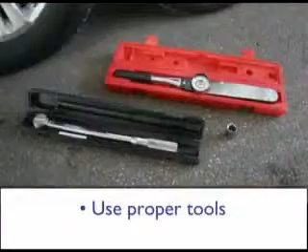To help ensure top performance and safety as you enjoy the freedom of the open road, we've developed this video to help make you aware of some important maintenance requirements for the wheels of your recreational vehicle. In this video, we'll show you how to maintain proper lug nut torque by following these important steps. Check torque before every trip. Use proper tools. Follow the appropriate star pattern sequence, and torque lug nuts in the correct stages and follow-up intervals after any wheel reinstallation.

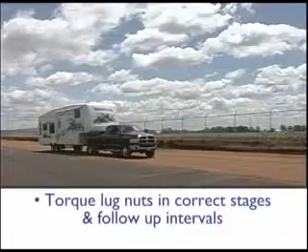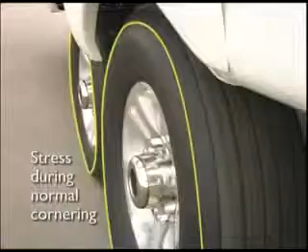The axle and wheel assemblies on your RV are designed and maintained differently than that of your car. The overall size, weight, and center of gravity of a recreational vehicle subject the wheels to pressures unique to trailering. As shown, during normal cornering, the tires and wheels experience considerable stress called side load. Due to the effects of side load on the axles and wheels, the lug nuts of your recreational vehicle require

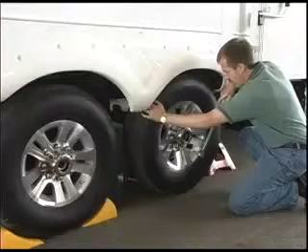periodic retorquing. As we begin this instruction, it may be helpful for you to have the axle manufacturer's owner's manual that accompanied your unit, so you can use the charts in the manual as a reference when performing service or maintenance on your recreational vehicle.

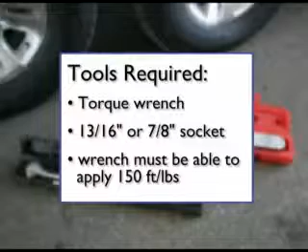The amount of rotating force applied to a fastener, such as a lug nut, is called torque. Proper torque of lug nuts can only be achieved using a torque wrench and a socket. Both tools can be purchased from your local auto parts store. Be sure the wrench you choose has the ability to apply at least 150 foot-pounds of torque.

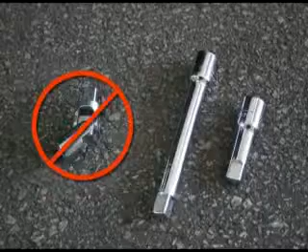Note that some wheel assemblies may require an extension. Be sure not to use a flexible extension. Do not use a four-way socket or any other type of wrench which does not measure the actual pressure applied to the lug nut. There are two common types of torque wrenches.

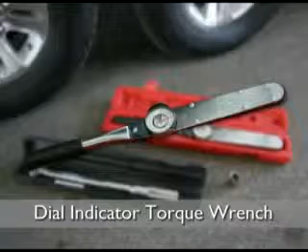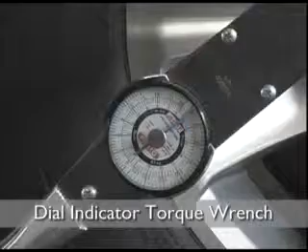The dial indicator torque wrench has a round dial that leaves a needle at the point of highest torque achieved. To set the desired torque on the dial indicator wrench, make sure your indicator needle is set to 0. As you apply clockwise pressure to the lug nut, both needles will show the current amount of torque being applied. When you reach your desired torque value, stop applying pressure and your indicator needle will stay at the highest torque value reached.

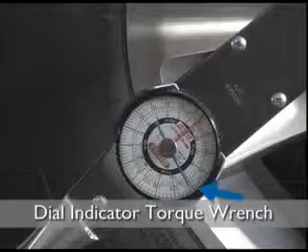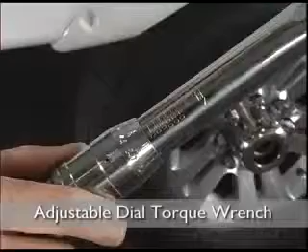The most common wrench is the adjustable dial torque wrench, which is often referred to as a clicker type because of the clicking noise it makes when it reaches the desired preset torque value. To set the torque on the adjustable dial wrench, unlock the handle and set the dial to the desired torque value. Then relock the handle.

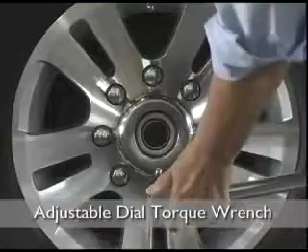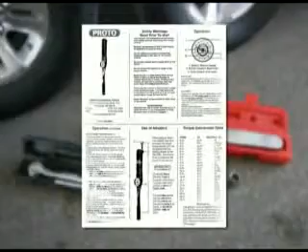As you apply clockwise pressure to the lug nut, you'll hear an audible click when the desired torque value is reached. Do not apply any further pressure once you hear the click. Most torque wrenches are required to be set at 0 when not in use to maintain calibration. Please refer to the torque wrench manufacturer's instructions for further information on use and maintenance.

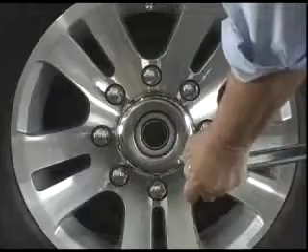As a part of each pre-trip inspection, it's important that you check the lug nut torque before every trip. Keystone RV recommends this maintenance procedure to ensure that proper torque has been applied to the lug nuts before heading out on the road. Using a torque wrench, the lug nut should be torqued to 110 to 120 foot-pounds on

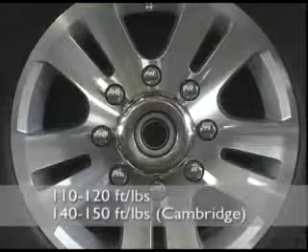all units except the Cambridge, which requires 140 to 150 foot-pounds of torque. This is due to the use of a 9/16 inch stud versus a 1/2 inch stud on all other units. Never exceed the maximum force mentioned when tightening wheel lug nuts.

When executing the torque process, it is critical that you follow a star pattern. This will assure that uniform pressure is applied to the wheel and hub. For 8-hole wheels, begin with the lug nut closest to the 12 o'clock position and proceed with the star pattern demonstrated.

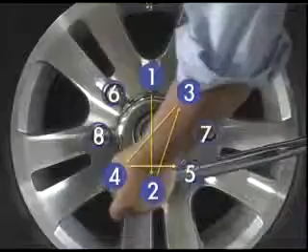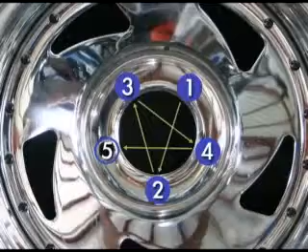For wheels with 5 and 6 holes, you will follow a similar pattern. Complete this procedure on each wheel. As you move to each new wheel, verify your torque wrench value before you begin the torque process.

Please remember, under or over torque of wheel lug nuts can cause the wheel to separate from the axle and could lead to property damage, serious injury, or loss of life.

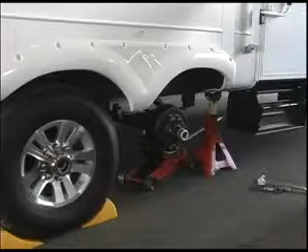Because the wheels on your RV are especially susceptible to loosening lug nuts after wheel removal and reinstallation, and because certain maintenance procedures require removal of the wheel, we will discuss the proper reinstallation procedures. After removing a wheel from your unit for any reason, you must carefully follow a two-step process: wheel reinstallation and

follow-up. Before reinstalling the wheel, you should carefully inspect wheel and hub surfaces for damage, and be sure all surfaces are clean. When reinstalling the wheel, every effort should be made to match the same studs and holes as when it was removed. Therefore, you may want to mark the stud and rim of one bolt before wheel removal.

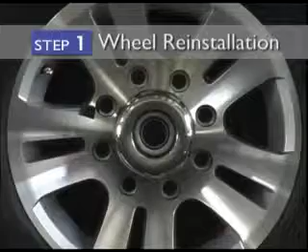During wheel reinstallation, the lug nut torque must be applied in 3 stages. Following these steps will help assure the wheel studs are centered in the wheel holes and will help the lug nuts maintain proper torque. First, start all lug nuts by hand.

Then, preset your torque wrench to 20 to 30 foot-pounds for stage 1, 50 to 60 foot-pounds for the Cambridge, which uses a 9/16 inch stud versus a 1/2 inch stud. For 8-hole wheels, begin with the lug nut closest to the 12 o'clock position and proceed with the star pattern demonstrated.

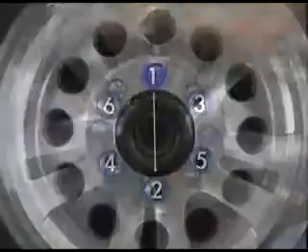For wheels with 5 and 6 holes, you'll follow a similar pattern. Refer to your axle manufacturer's owner's manual for detailed diagrams of each star pattern sequence.

Before you begin stage 2, preset your torque wrench to 55 to 60 foot-pounds, 90 to 100 foot-pounds for the Cambridge. Apply torque to all lug nuts following the star pattern. After stage 2, the wheel is secure enough to support the weight of the trailer and can be lowered off

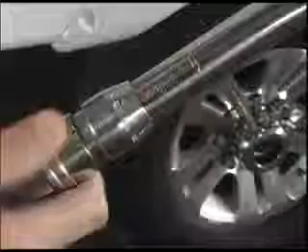of the jack stands. For stage 3, preset your torque wrench to 110 to 120 foot-pounds, 140 to 150 foot-pounds for the Cambridge. Apply torque to all lug nuts in a star pattern.

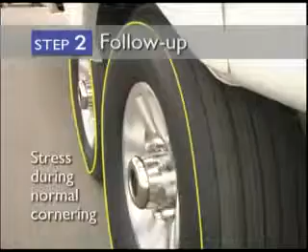Unlike your car, the wheels on your recreational vehicle must support stresses unique to trailering during normal operation. Therefore, to ensure the lug nuts maintain proper torque, it is critical that you repeat stage 3 of the torque process after driving your unit 10, 25, and 50 miles following any wheel reinstallation.

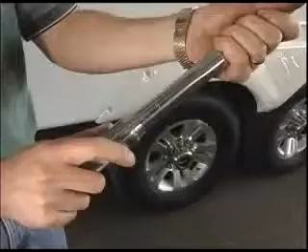Pull your recreational vehicle off the road into a safe work area and begin the follow-up process. Begin by setting your torque wrench to 110 to 120 foot-pounds, 140 to 150 foot-pounds for the Cambridge, starting with the lug nuts closest to the 12 o'clock position. Apply torque to all lug nuts in a star pattern.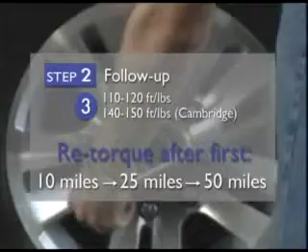After you've reapplied torque at 10, 25, and 50 miles, the follow-up process is complete, and you can refer to the general lug nut torque maintenance process described earlier. Please remember, under or over torque of wheel lug nuts can cause the wheel to separate from the axle and could lead to property damage, serious injury, or loss of life.

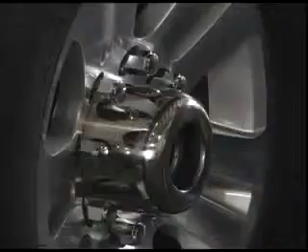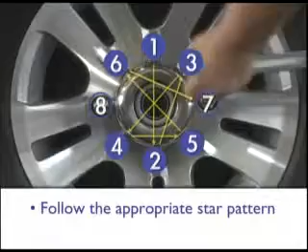Checking torque before every trip as part of regular wheel lug nut torque maintenance and after reinstalling a wheel is the best way to ensure safety and to optimize the performance of your RV. Remember, to maintain proper lug nut torque, you should check torque before every trip, use proper tools, follow the appropriate star pattern sequence, and torque lug nuts in the correct stages and follow-up intervals.